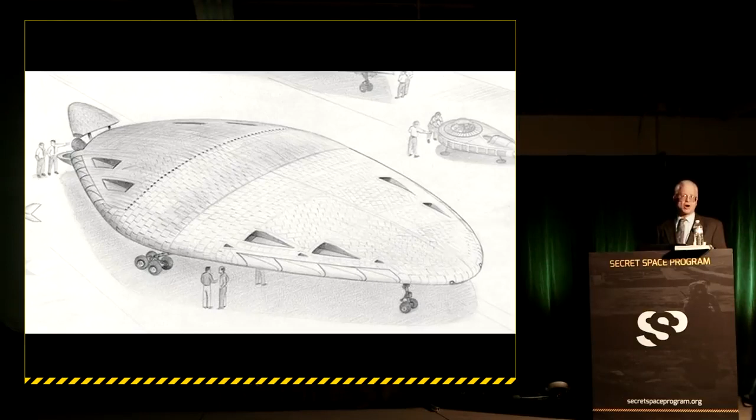Okay. This is the first generation Aurora. It was a remotely piloted vehicle. It was built by Lockheed Martin. And this object you can see in the distance was actually taken from a Polaroid photograph that was taken in 1984 near Cedarville, California, up in the northeast corner of the state.

Now, this is one of the other vehicles here. This is a drawing put together by my friend Michael Schratt. This particular vehicle I'll go into a little bit as well. It was a part of a crash recovery in East Germany.

Now, after I got out of high school, I realized that in order to go to the... Okay, there we go. Sorry about that. One of the things I was going to need to be able to do in order to go to the college I wanted to go to, which was a place called Art Center College of Design in Pasadena, I wanted to design cars for General Motors. And this was the premier college that all the designers would go to. And at $2 an hour minimum wage at the time, I knew that there was simply no way that I could afford to save up the money to go there. So I decided to join the Air Force and get the GI Bill to help pay for my college education.

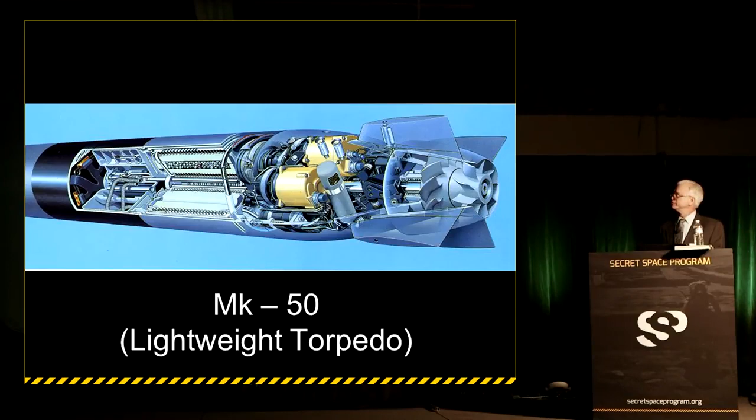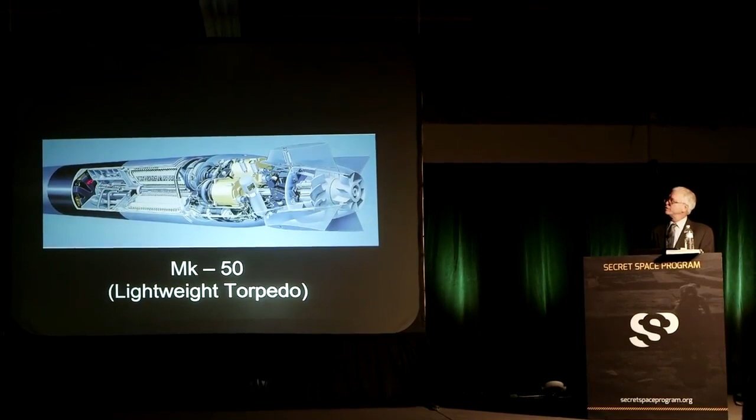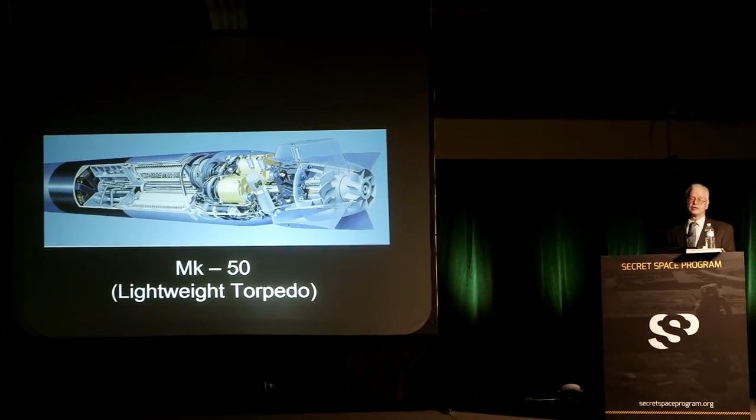This is a cutaway illustration of a propulsion system for a lightweight torpedo that basically involves a lithium core that is ignited once it drops into the water. And this heats up an oxidizer, flows through here, it creates steam, high temperature steam through these heat exchanging tubes here, goes through a transmission, drives a generator, and also a couple of counter-rotating props in the back.

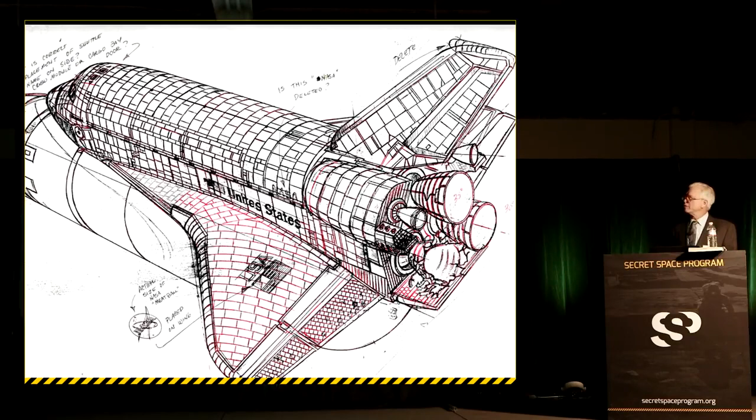But being able to figure all that stuff out, and I take a lot of pride in the accuracy of my work, involved a certain amount of engineering. And even though I'm not an engineer, I don't have an engineering degree, I spent an awful lot of time studying how things are put together, how they work, what makes them function, what the physics and the engineering are behind these systems.

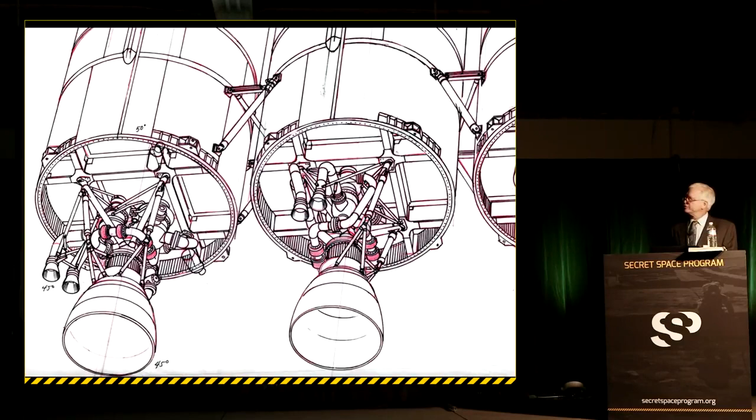But eventually, while I was working in the industry, I actually had the opportunity to make contact with a lot of people in the military, some of whom expressed an interest in having some of my artwork in their squadron ready rooms. And so I was actually able to arrange to get what are called media orientation rides and go up in these planes and see how the pilots handle the stress of flying.

And I kind of wonder whether or not we ever would have been able to get off the ground if we hadn't had those other naturally occurring creatures to give us inspiration. And so as we began to learn how to fly, as the Wright brothers and all the other pioneers put together these machines, it gave us this capability.

Of course, there was a military application. First probably was seen during the First World War in Europe, using aircraft for observation or for bombing and harming the enemy troops. And so, as time went on, there was a competition between the different sides, looking for ways to raise the performance level of these aircraft so that you could outmaneuver your competitor, build an aircraft that could pull more Gs.

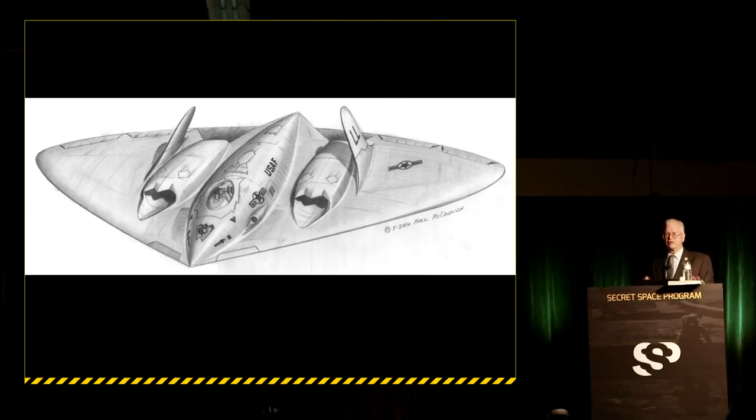There are ways that you can modify the inlets for the engines so that when a radar beam from a distance is looking at the sky where the aircraft is, it's harder for that radar to get into the inlet where those metal turbine blades are turning and reflect a lot of the energy back and let the people watching for you know that you're there. And so applying these different techniques, looking for ways that you can make an aircraft perform better and do it very quietly, very stealthily, even in the materials that are used.

I'm sorry, I pushed the wrong button here.

These aircraft have a number of ways in which they can be deployed. They can be deployed by flying right off of a runway, or they can be deployed as a parasitic aircraft, as in this case. This is the second generation Aurora on a carrier vehicle. There have been a number of questions about what the name of this vehicle was, but for me, the discovery of its reality was kind of what led me down the road to being aware, or suspicious anyway, that there was a kind of secret space program.

And so the way this happened, I was approached by Lockheed Martin. I think at the time they were still referred to as only Lockheed. And the particular division that I was approached by was approaching me on behalf of the Skunk Works division. And they said that we have a new aircraft that we want to build, and we need to get the appropriate funds from the government. So we need you to create an illustration for us that shows an aircraft that's really fast, something that looks dynamic, very, very fast.

And at the time, I was reading some of the trade journals like Aviation Week and Space Technology, and I knew that one of the up-and-coming technologies that they were talking about was something called scramjet technology, which is kind of shorthand for supersonic combustion ramjet. Basically, it's an engine that kind of starts out as a normal turbojet with turbine blades that are turning, and then you can change the flow of the air through the system so that it largely becomes just a big tube that you dump fuel into, and the air rushing into this venturi, this tube, is being jammed in there so fast and at such pressure and under such heat. When air is compressed, it heats up, that this particular mechanism would cause almost a spontaneous combustion, if you will, with very little input to make the combustion process and the forward thrust continue.

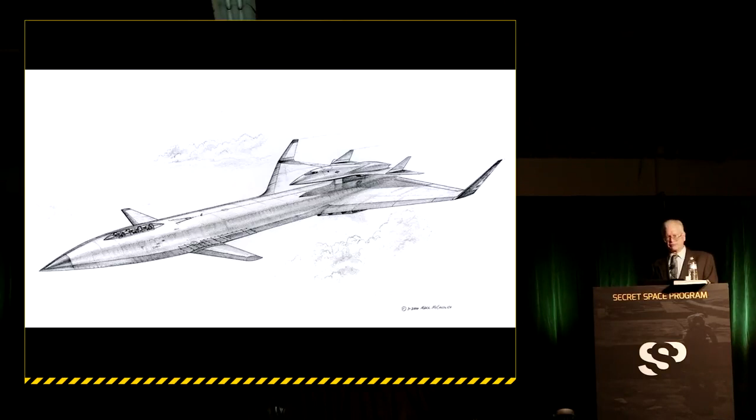It turns out that shortly after I submitted a sketch of this particular aircraft, they decided that they were just going to completely scrap that. And so I wound up doing an illustration of an aircraft something like this. There was one proposal where it might actually be possible to deploy this particular aircraft right out of the back end of a flying C-5A Galaxy. And this is sort of my conceptualizing of how many you could actually fit into a C-5, knowing what the size of this aircraft was.

It had a scramjet nacelle on the ventral surface, and it also had one on top. This particular version only had one underneath. And because of the shape of the aircraft, it made it very peculiar, or very sort of awkward, where the landing gear would come out in order for this thing to work properly.

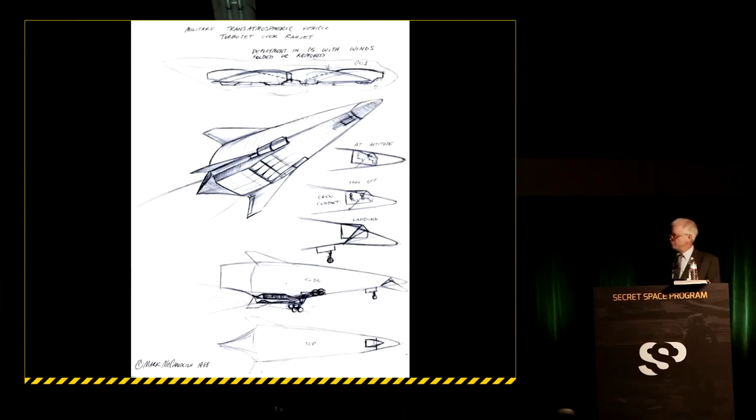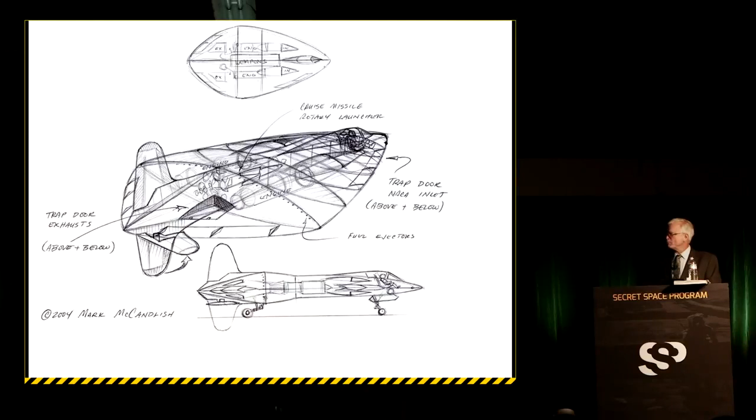Now, about the same time, there was a lot of talk about a crash, an aircraft vehicle crash that had occurred somewhere near Barstow, California. And there were some people that were describing different features of the aircraft. There was a fellow that I met and talked with who was friends with a number of the astronauts, and they were describing how there was a particular astronaut flying a Learjet, ferrying it from one location to another through the state of Nevada.

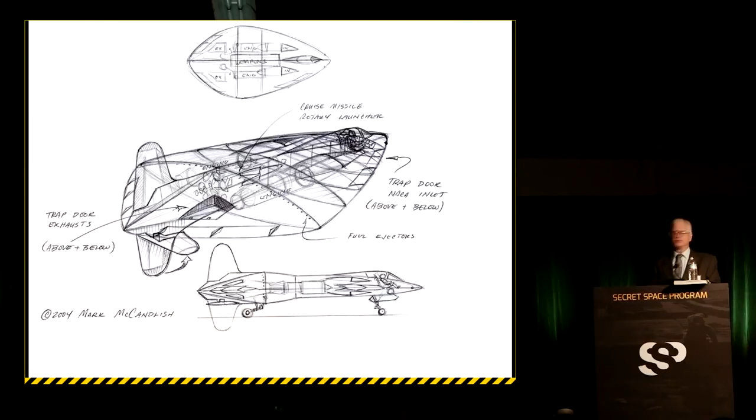And he came out of the clouds and he found himself sitting slightly above and behind an aircraft that looked just like this. Now, the interesting thing about this aircraft is that it had some very strange features. It had engines that were buried inside the fuselage with sort of an NACA duct-shaped inlet there. There was kind of a slot in the back. It looked like there was maybe a trap door, control surfaces along the bottom, exhaust diffusion.

But it also had this very interesting feature, and most people don't know this, that the predecessor of the SR-71 Blackbird, the YF-12A, which was kind of a strategic aircraft used for missile delivery, also had a folding ventral vertical stabilizer, or tail as you would call it. And so this aircraft obviously had that same particular feature. The vehicle was all black, or sort of a deep gray.

And as the pilot was flying along, looking at this thing flying through the clouds, he suddenly realized that if he had not seen this thing directly, he might have collided with it as they were flying through the clouds together. So he gets on the radio to his ground control people and says, I've got some traffic up here, why didn't you warn me? And they said, well, there isn't any traffic up there. And he says, well, of course there is, I'm looking right at it. It's black, shaped like a flattened out football shape, no wings to speak of, two tails, one above, one below.

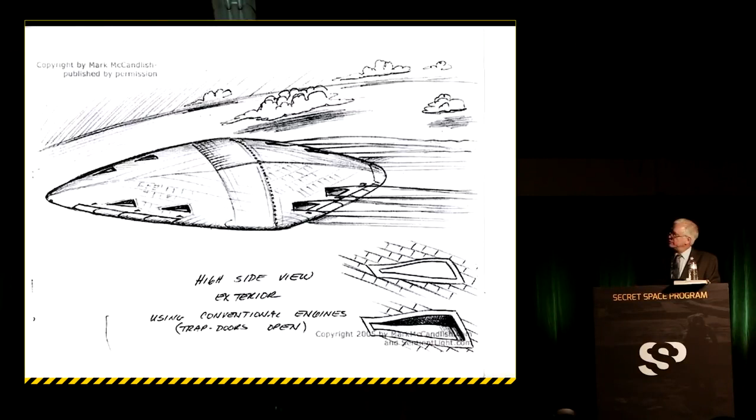And so he went through a lengthy debriefing about what he saw or what he shouldn't have seen regarding this particular aircraft type. Now, one of the things that this particular aircraft had that wasn't immediately available or immediately evident was a ridge that ran laterally across the widest part of the aircraft. And on that ridge were a number of what looked like fuel ejectors or fuel injectors pointing outward.

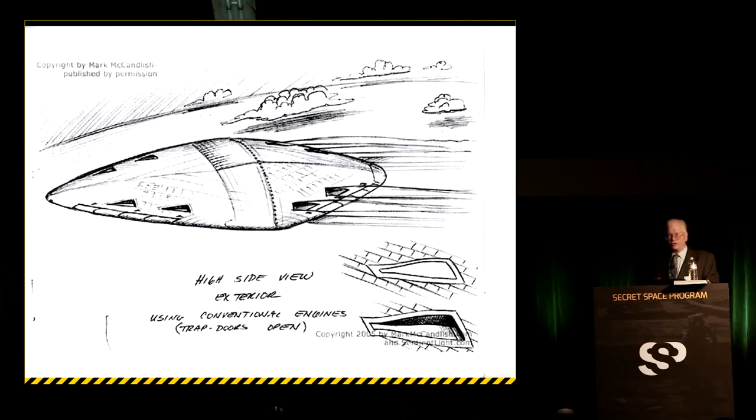And this aircraft here was then being described within the industry as this vehicle that would produce an exhaust trail, the so-called donuts on a rope exhaust trail. That seemed to imply that there were two different propulsion systems in use in the aircraft to get it up to speed. Nobody really understood what they were or what actually made the aircraft function in the way it did.

But as it happened, I was asked to do this painting for Popular Science on the so-called Mach 5 spy plane, and it went into details about all the seismic events in Southern California that sort of raised the curiosity of some of the people to watch what was going on. And I remember at the time, this was in the late 1980s, early 1990s,

that you could go out into the high desert of Southern California at night and you could see these things flying overhead, flying back and forth. When the sun was just below the horizon, it was dark out, but there was something still up there. You could see it moving and moving very quickly.

Now, about the time that I did that illustration for the magazine, I was contacted by a friend that I went to college with, and I invited him to go to this air show at Norton Air Force Base in San Bernardino, California, which is about 75 miles east of Los Angeles. The Thunderbirds were going to fly, and it was a little bit of an overcast day, but in the end, I wasn't able to actually attend the air show, mostly because I had to complete another illustration for a client over the weekend.

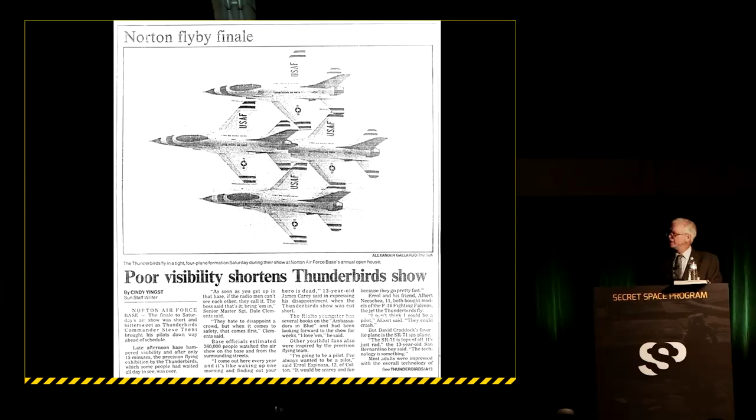Now, as they were going into the hangar, the gentleman turns to my friend and says he just realized that there are some aircraft on exhibit here that you're not cleared for security-wise. You are not cleared to see these aircraft. So just enjoy the show, walk around, listen, take a look, but don't say anything to anybody.

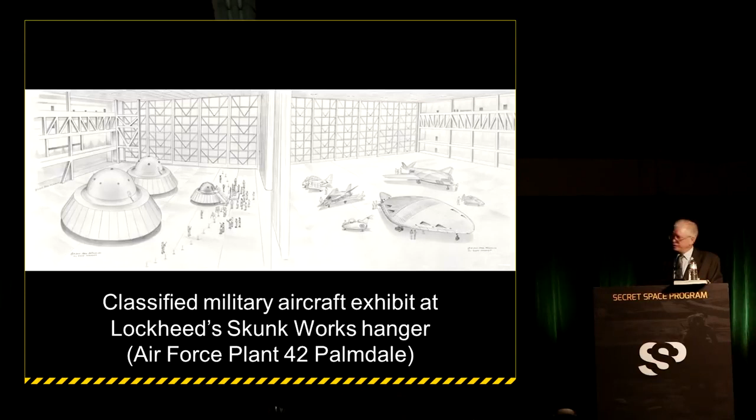Oh, I'm sorry, right here. This particular vehicle here, this is kind of a close-up, a rough close-up. It was a sort of an answer to or a follow-up to the A-10 Warthog, which was an anti-armor aircraft. It's a vehicle that carries a very big Gatling gun, fires thousands of rounds per minute, and is a very durable, very hard aircraft to take out of the sky. It's very heavily armored. Has a big gun that sits inside of it.

And so this aircraft here was designed with a very unusual kind of a wing. Now, in aerodynamics, they have something called the Coanda effect. And basically, it involves blowing air across the surface of a wing to provide lift rather than just relying on the movement of the wing going through the air in order to provide that same lift. So the design of this aircraft was that they came up with a way for mounting the engines above and slightly ahead of the wing, and then they took these high-temperature alloy, it's like a flattened-out funnel shape, really, that blows right over the wing.

And when the wings are all rotated in sequence, it forms a nice smooth ramp that the air can actually flow down. It goes from horizontal, following the surface of the wing with this Coanda effect, kind of an aerodynamic adhesion in a way. And so it redirects the thrust of the engine to a point where it's pointing almost straight down, right about where the center of gravity is for the aircraft. Now here's a computer-generated image that shows a little bit more detail of the same vehicle.

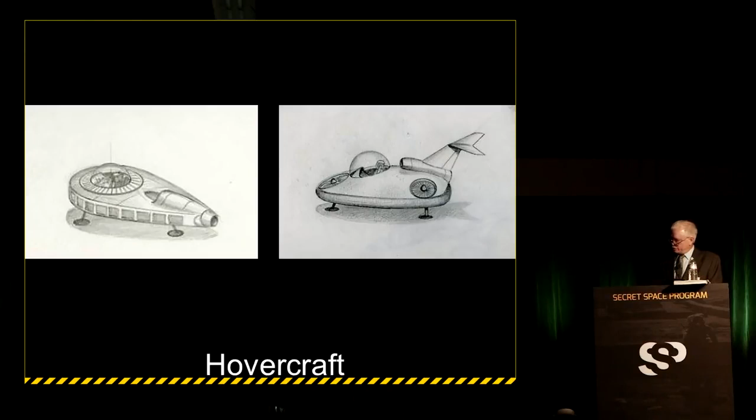The hovercraft were kind of unusual. There was one that had a jet engine in the tail of it, kind of a teardrop shape, and then around the perimeter it had a series of little trapdoors that would open and close as the thing was flying along. And this jet engine also had a transmission that connected up to a set of counter-rotating turbine blades that surrounded what amounted to a bubble-type cockpit, almost like something you'd expect George Jetson to be flying in one of his little cartoons.

This one over here, I've actually seen a version that's very similar to this in one of the popular science magazines, where it had a turbine in the front and two in the back, one on either side, that were driven by this particular engine here through a transmission of a kind. And it had the same sort of sphere-shaped cockpit too.

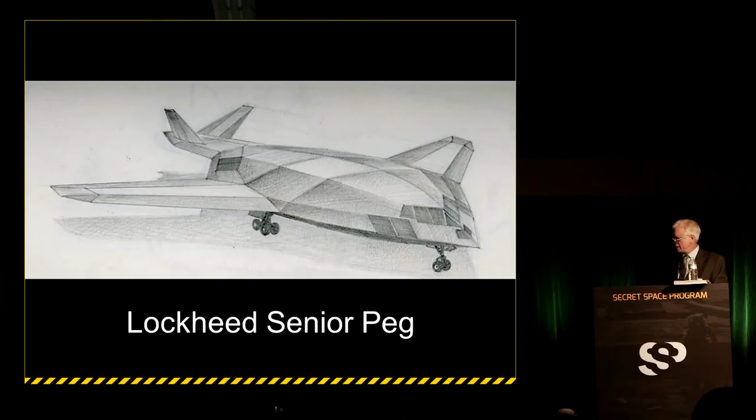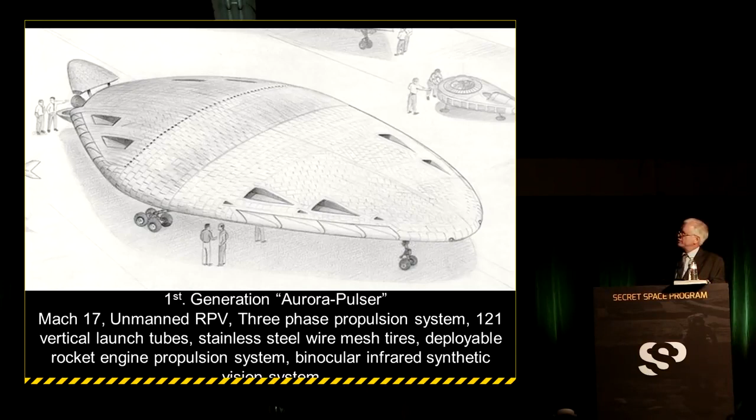And just like the aircraft that I showed you earlier that had the tail above and below the fuselage, this aircraft had the NACA duct style inlets for 4 engines and 4 exhausts, and this is both on the top and on the ventral surface or the belly of the aircraft. In fact, after I had discussed this particular weapon system on Coast to Coast with one of the hosts, I received some email from a number of sources indicating that there were inlets and exhaust ports both on the top surface and on the ventral surface.

Now, at the time of the exhibit, my friend said that he could only see the underside of the aircraft. He couldn't see the top of it because it sat up kind of high off the ground. And so he didn't know whether there were 8 exhaust ports or only 4. And it turned out that one of the people that I corresponded with after doing the radio program said that they had been jogging late at night during an evening when there was an aircraft like this leaving one of the United States Air Force bases in Great Britain.

And he said that what was unusual about the aircraft is that when it went to take off and it lit up the afterburners, which dumps a lot of extra fuel into the exhaust stream, you see this sort of a bluish glow coming out of the exhaust. He said there were 8 ports, which of course helps to point out that you have 4 above and 4 below. So we knew that was true.

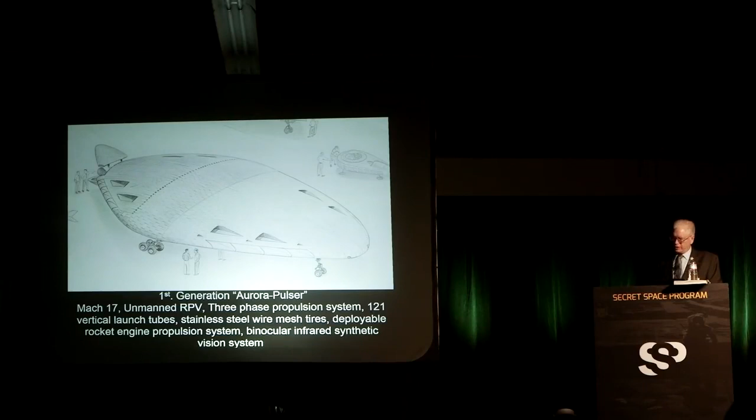The way the system would work was remarkably simple. It had a kind of tile with explosive bolts holding it in place on the outer skin, and sitting up behind it, the weapon would be held in place. It's not shown in this thing, but I've subsequently learned that there was a three-piece fiberglass sabot which would hold the weapon straight in the bore, so it would always be pointing a certain direction. But the ingenious and simple aspect was that when the explosive bolts on the outside were ignited, the tile would disintegrate and blow away. And when it did, a big coiled spring about 12 inches in diameter behind the vehicle would push it out of the hole.

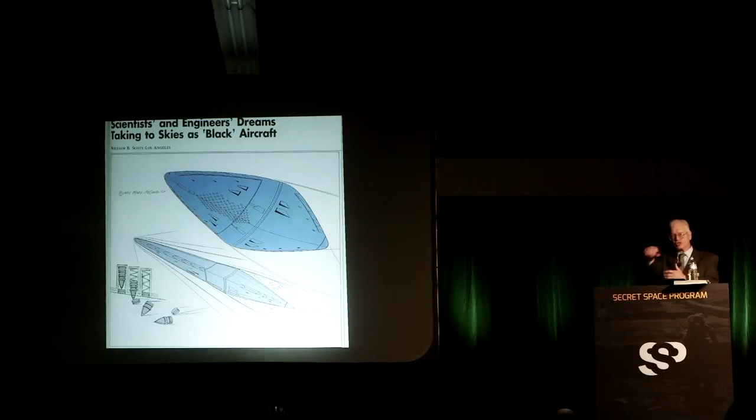And right behind the reentry vehicle was another tile that would slam down into place and cover up that hole again, in about a tenth of a second. The reentry vehicle, let's see, right there, would then stabilize, because of its center of gravity weights and its shape, in the airstream, go into the atmosphere, and be able to acquire its target and do its job.

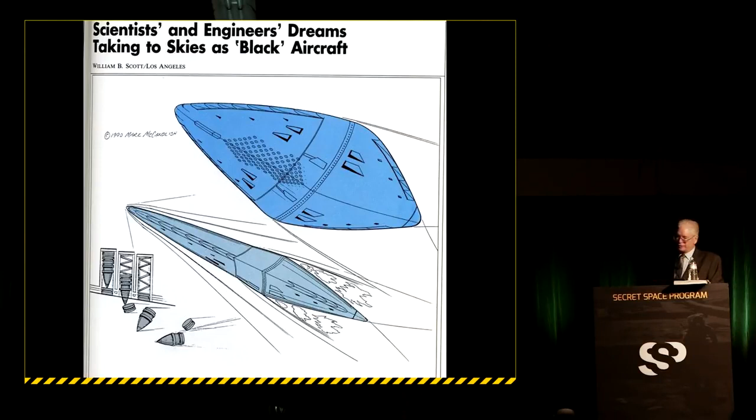One of the things that this particular aircraft would do, if you look at the ridge here where these fuel ejectors were located, would expel the fuel, and the fuel would be ignited by just the intense pressure and heat of the air flowing across the front of the aircraft.

Now, one of the things the artist did not capture in this particular view was the fact that the front end of this thing is going through the air so fast that it's glowing red hot, just because of the velocity, the friction going through the air at such a high speed.

And so as that air is further compressed as it comes up on this ridge right here, it meets with the fuel. As the fuel is sprayed into the airstream, it spontaneously combusts. But by this time, the aircraft is already going well over Mach 1. So there's a supersonic shock wave that forms and basically separates,

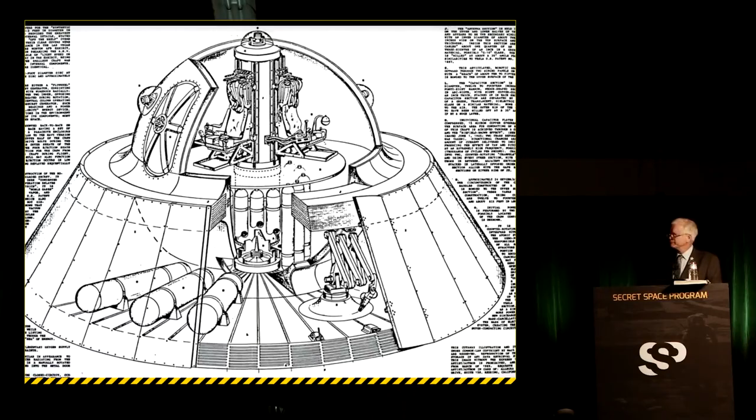Now, that number was very significant because shortly after this particular information came to me, the Los Angeles Times newspaper was running a story about crop circles. And there was a lot of debate about whether it was something that was being hoaxed or whether it was some kind of a natural phenomenon, highly ionized winds blowing over the hillsides in Great Britain, this kind of thing.

But some researcher went back a year later to see what would happen when the new crop grew up out of that same soil. And they discovered that when these crop circles grew back, they grew back with a perfectly symmetrical pattern having 48 spokes, the exact same number of capacitor sections in this particular propulsion system. So I began looking at, how would you produce a crop circle using a propulsion system like this?

Well, we know that the system has a series of coils around the crew compartment here. There's another series of coils that go up in this central column. So this layout has a configuration that looks very much like a Tesla coil, which is really just a high voltage transformer. You take a certain amount of voltage, you put it in, the two coils reach a kind of resonance, and in the process, it steps up the voltage to a much higher level, millions of volts in the case of something this size here.

And so when you put all of that electricity into a capacitor array down here, where you have all these plates that have positive and negative charges, you can build up a tremendous amount of voltage. Now, the first thing I thought of when I saw this was that this must have some bearing on a phenomenon that was discovered by Alfred Biefeld and Thomas Townsend Brown back in the 1930s or 1940s called the Biefeld-Brown effect. And really all it amounted to was putting a lot of voltage on a set of parallel plate capacitors.

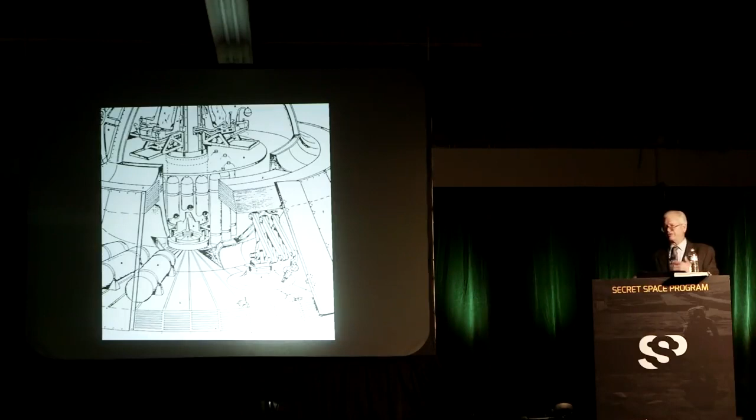So if you have, as in this instance, coils of single filament copper wire, or at least what appears to be single filament copper wire, running through this quartz-like material without multiple strands to conduct more electricity, it just seems like a contradiction. And so I began wondering if this wasn't just copper wire, it was copper tubing, and there was something else on the inside of the copper tubing. So then I looked at some of the notes from the eyewitness, and he described wrapping around the inside of this central column, and I thought of this as sort of like a cyclotron or some kind of device that produced high voltage. In fact, I think what was really happening was that the electricity would jump between these 2 points and create a high voltage event.

Now, free energy is kind of a misused term. Technically speaking, with gravity, if I were to drop this, I know for a fact it's going to drop to the ground, and that potential energy can be used. That's what's used in a hydroelectric dam: the potential of the water sitting up high, flowing downhill through a turbine blade, creating electricity. Solar energy hitting a photovoltaic array is a kind of free energy too. They're not trying to kill people for creating it, but the minute you create a device that produces more energy than you put into it, people start to get really worried, because if you're not real careful about how you apply the technology, you can get into what is called a feedback loop, like the sound problems we've had, where the sound produced by the system feeds back through the microphone, multiplies upon itself, and snowballs to the point where you get an unpleasant result.

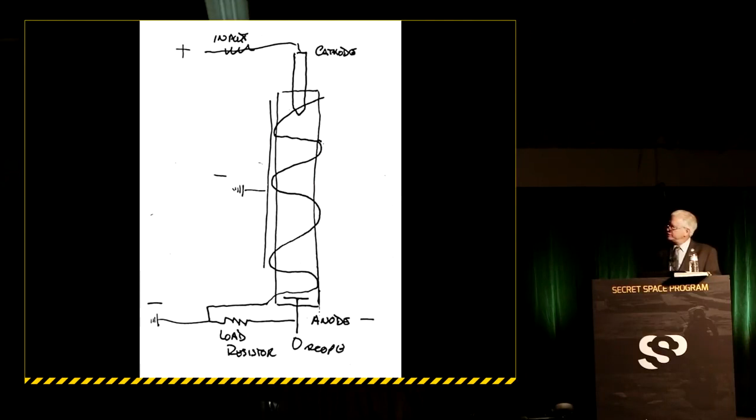So I started looking at what zero-point energy is, where it comes from, how it can be manipulated. And I looked at some of the papers that were written by scientists like Bernard Haisch, Alfonso Rueda, Hal Puthoff, Daniel Cole. And in the early 1990s, they wrote a number of papers that actually described, and you can see the similarity between the two things. You can see that there's clearly a design similarity.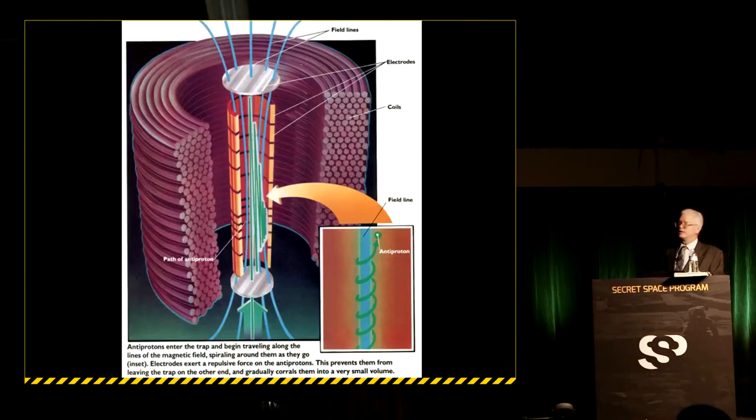And yet, I look for other possibilities as well. The possibility that we had something like an anti-proton trap going on here, where you have the same kind of coils going around the outside, a central column, a way of trapping antimatter. I thought that this might be something like the so-called antimatter drive that was used in some of the Star Trek vehicles. So I began conceptualizing, began looking at different ways that you could actually make this system work.

Now, I think it was somewhere in the late 1990s, early 2000s, I came across a number of books. Joseph P. Farrell, who's another one of the speakers here, had found some historical records after the Second World War that described a device that was being worked on by the Nazis in the Wenceslas mine up in southern Poland called the Nazi Bell Project, or Die Glocke.

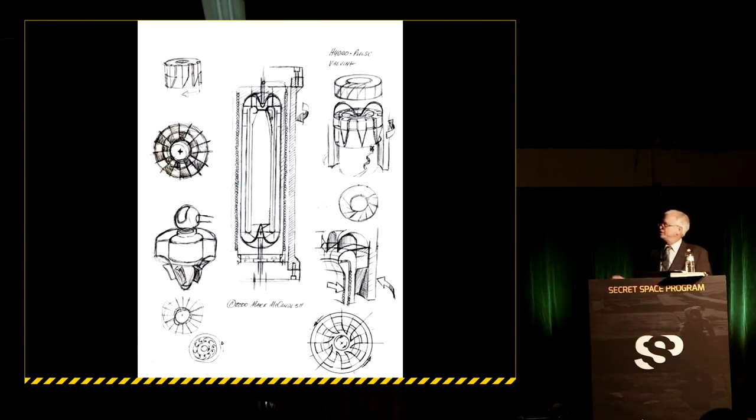Now, that particular system, based on the documents that were found, was made up of a pair of counter-rotating cylinders, one inside the other, with a coil that went around the outside. And electricity was being fired through the system. So I started looking at ways that you could make that work. Now, the first thing I thought of was that if you put a lot of electricity in this thing and you have big coils around it, you may wind up in a situation where you can't get an electrical motor to actually drive the system unless you had a pulley system sitting way off to the side, away from the electromagnetic fields that would interfere with its operation.

But I found out that, of course, mercury has some interesting characteristics. I think there's something referred to as the nuclear spin ratio. The particles in the nucleus of the atom of mercury and the electron shells, there's a spin ratio of something like 60 to 2. And bismuth, by the way, also has the same kind of property. And so I thought it was interesting that these two materials had these unusual characteristics that might make them very important in the operation of this kind of thing.

But what I found was that it goes all the way back to Michael Faraday, and the first electrical motor was really just a puddle of mercury with a magnet, a permanent magnet sitting in the middle of it in a petri dish. And he had a little scaffold off to one side with a copper conductor, and he put one wire into the mercury, sent it over to the battery. Another wire would hang down from the top of this little scaffold. And the minute you connected the circuit, the mercury would begin circulating around inside the petri dish, around this magnetic field.

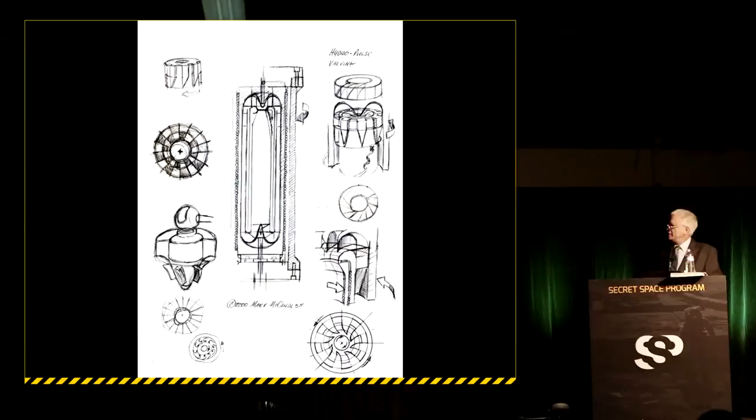And so if you look at the way the field lines are set up in this particular vehicle here, you can see that the field lines basically will go out around the outside and stroke down through the middle. That's what they do. And so by setting the system up in the way that it has been, you already have the built-in mechanism to make this thing rotate on the inside, just like Michael Faraday's little motor from back in the 1820s, I think it was.

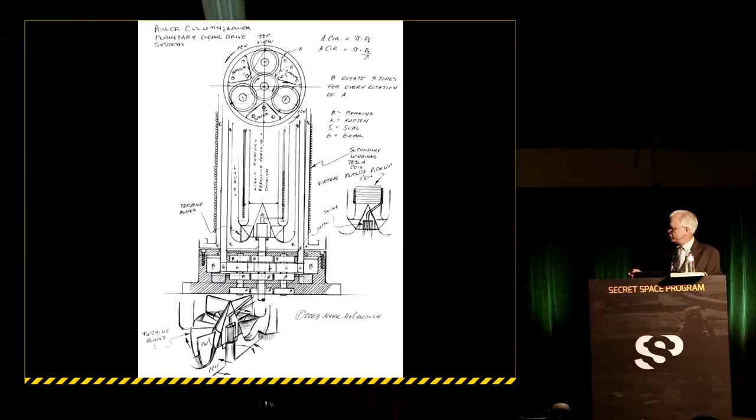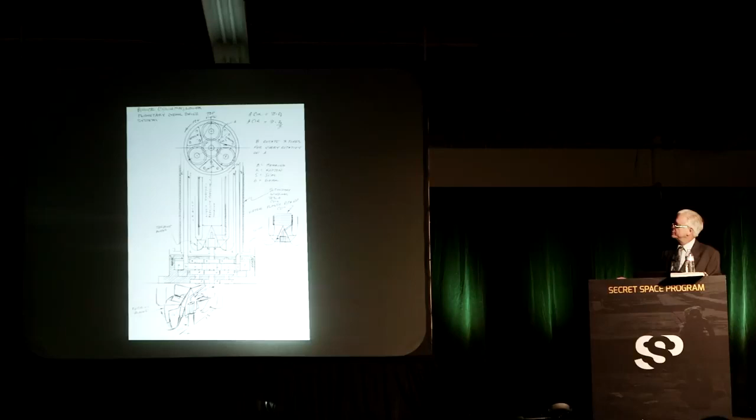But the other thing that I realized was that you're going to have some way of circulating the mercury. And so in one of the instances that I was looking at ways to mechanically do this and to get this counter-rotation thing going on that was described in some of the papers from the Nazis' experiment, was creating a kind of a planetary gear drive system that would sit either at the top or the bottom, so that as one of the cylinders is turning in one way, the gears would actually force the other cylinder to turn in the opposite direction.

And the benefit of doing something like this is that when you have things turning in opposite directions or sliding across one another, you get this vorticular motion in the mercury. And it seemed to me that that particular vorticular motion was something that would be very significant, very important to the operation of the system. And it's all leading up to the tapping of zero-point energy, which I'm going to get into here shortly.

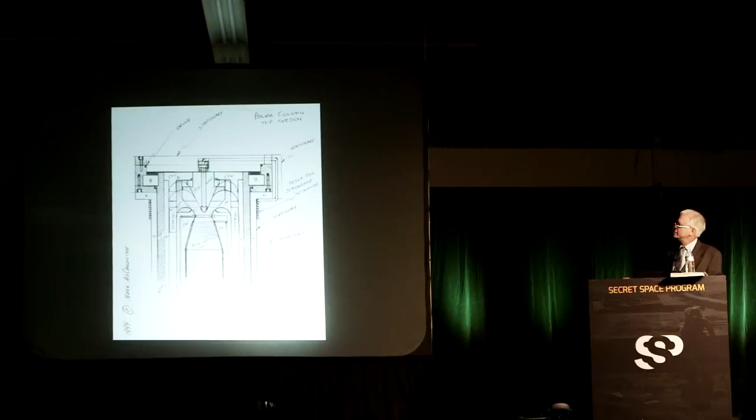But the idea was that the mercury would come up in the gap between the two cylinders, it would reach the top, and it would be basically forced down through this venturi, this little funnel-shaped opening in the bottom. You'd have your cathode up here at the top, and you'd have a ring embedded in the quartz of the interior cylinder. This is the other cylinder on the inside here. And you'd have coils inside so that as the mercury was being charged with electricity, it would actually cause the mercury to be circulating. But because the cylinders are turning in opposite directions, you get this natural sort of tornado-like vortex formation in the movement of the mercury through the system.

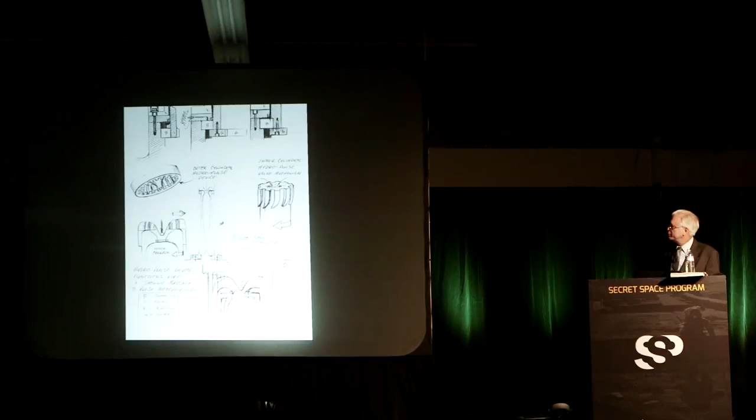Now, the next thing that I did, it's not as easy to see in this particular diagram. I wonder if the next diagram has, here's a little bit better way to see it right here, down here in the corner. You see the mercury comes up here, and it goes down through this opening, and then right below that second electrode that's shaped like a ring right there, you get the electricity jumping from there to there as the mercury is being pumped through by the natural flow caused by the electricity that's going through it.

A sudden discharge of electricity goes through the mercury, and the mercury is spinning the whole time. It's spinning like a tornado. You send the electricity through it, and when you do, it creates a phenomenon that's very similar to when a smoker blows a smoke ring. And if you've ever studied a smoke ring, you can see that it's caused by a sudden discharge of the smoke from the lips of the smoker, and the surrounding still air slows down the outer edge of the smoke as it's being expelled. So it creates a self-stabilizing event where the smoke forms a perfect ring. Even dolphins can do this with the air that's blown out of their blowhole.

Now, the other thing about that is that you find that this phenomenon is moving downward, probably at something approaching supersonic speeds, down through this central column here.

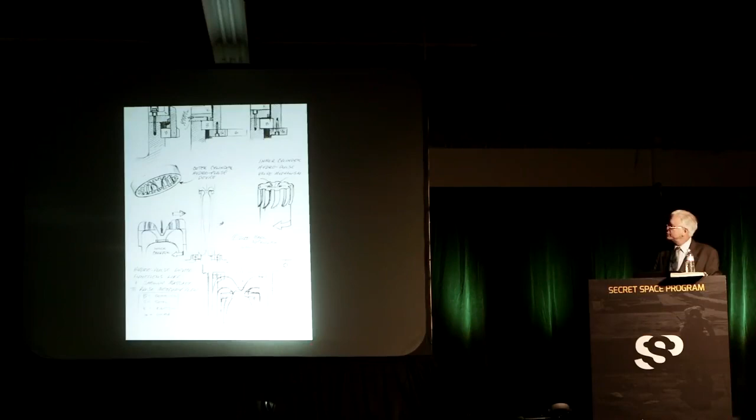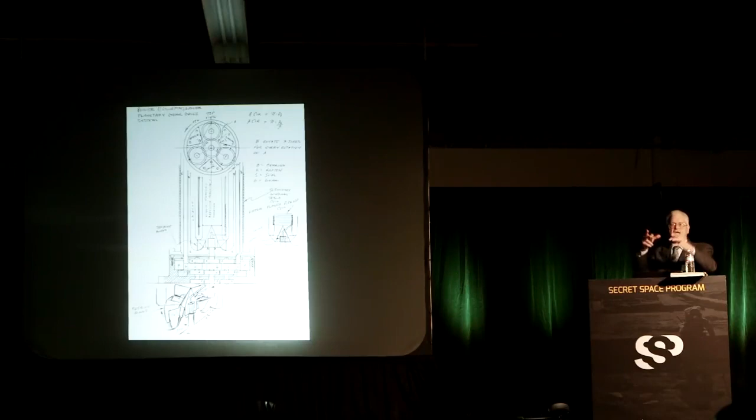There we go, down through the center, right there. That because of the rotation of the device, not only is it creating a kind of a smoke ring of ions, highly charged ions that are blowing down through the center of this device, but you also have a precessing, a rotating around a horizontal axis and a vertical axis, so that you have this twisting motion that goes on.

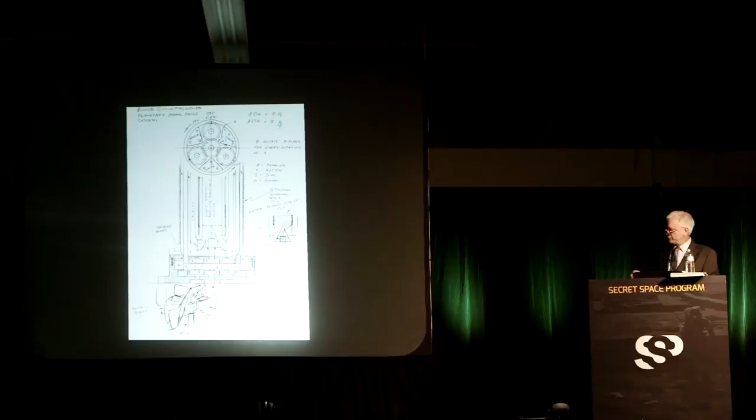And so what it winds up simulating is ball lightning, which is a naturally occurring phenomenon. It's noted for its ability to sort of be self-sustaining. It creates its own electromagnetic field. So in the process, what I really think that I've sort of stumbled across is a way in which

this system here has three different electromagnetic fields. It has the one created by the primary windings of the Tesla coil. It has the windings in the center that also create their electromagnetic field. But then when that plasma ring, or I should say it's actually a sort of a low temperature plasma-like phenomenon, or a virtual plasma, fires down through the center, it also creates its own set of electromagnetic field lines.

And so what happens is you have an effect that's very similar to, you've heard of the electromagnetic pulse that occurs when a nuclear bomb goes off. Well, they actually have a weapon. It's called the explosively pumped electromagnetic pulse weapon. And it does the same thing. It just combines overlapping electromagnetic field lines, and then using explosives, it pinches all those magnetic field lines, and it creates a powerful pulse.

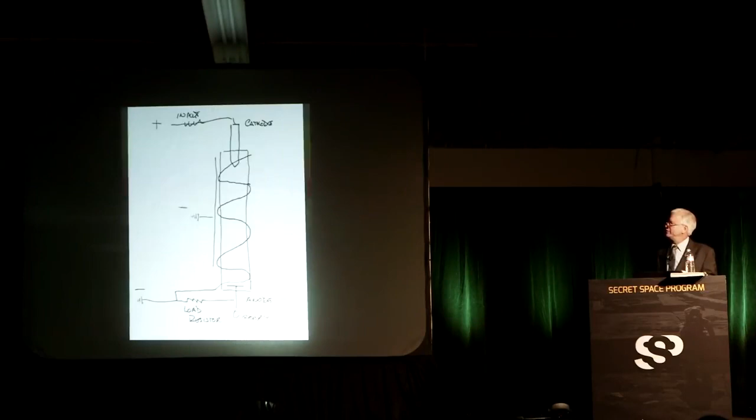And so what I'm suggesting to you is that process actually forms a kind of a doorway for tapping into this zero-point energy. Now, why is that significant? Why does that mean anything? Well, part of the reason is that this device, when it taps into zero-point energy, they've shown that zero-point energy is actually responsible for the effect of gravity, for inertia, and for mass.

And so if you're pulling some of that energy out of the environment, even though there's an infinite amount, some of the latest figures are 10 to the 109th power joules per cubic centimeter. That's one of the latest figures I've seen. That's a monstrous amount of energy. That's enough energy that if you took all of the energy that's in this amount of space-time and were able to tap it, it would be able to boil off the oceans of the entire planet.

So you can see how this technology makes a hydrogen bomb look like a firecracker. That's probably one of the reasons why there's such a tremendous effort to suppress it, because in the wrong hands, obviously, it could be weaponized and be very dangerous. But if used in peaceful ways, of course, it provides you a tremendous amount of power.

And that power, when pulling this energy out of the environment, it's my belief that there is a moment in time where it doesn't allow that zero-point energy to interact with the atomic structure of the vehicle. Now, this interaction is what is referred to as the creation of mass. For example, Einstein said you can never travel faster than the speed of light because as you accelerate through space-time, your interaction with the zero-point energy that's embedded in space-time raises your mass.

And so it makes it harder and harder for you to go faster and faster, so you can never really reach the speed of light. In fact, he said that as you approach the speed of light, your mass would become near infinite. So imagine then that you're actually using the free energy of zero-point energy. You're tapping that as your propulsive force. You're using it in the environment.

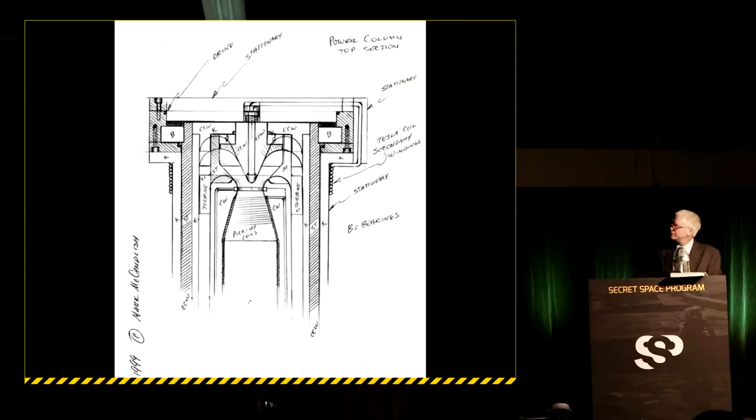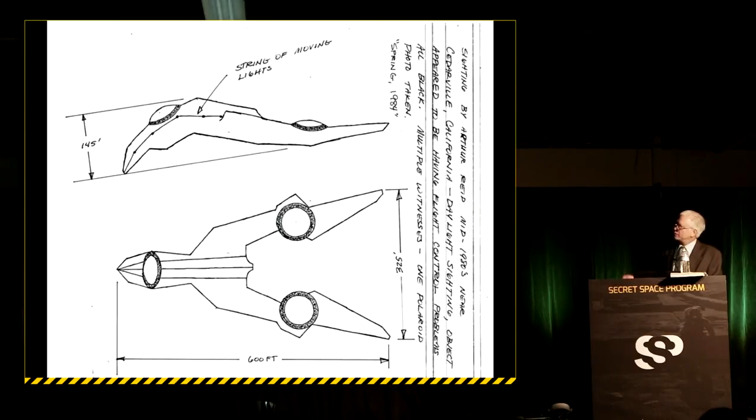Now, under a loupe looking at the original Polaroid, you can actually see a little bit more detail. This was a drawing done by the eyewitness, the fellow who took the photograph. And there were some things about it that I could probably go into, but the thing that's important to remember is that some of the features look remarkably like some of the structure on the so-called alien reproduction vehicle.

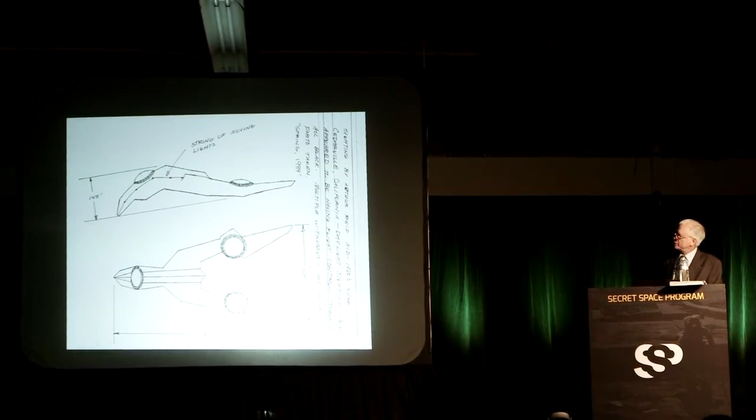And in fact, it did seem apparent to him that these wingtips, if you want to call them that, could actually rotate inward so that this thing would actually become more of a triangular shape, which also, of course, would help with issues like storage. Now, this is a little bit more detailed drawing that I did based on what I could see through the loupe. Actually looks like there may be some ways in which this area and this area here can be articulated so the thing can kind of fold itself up for storage or for putting it into a hangar.

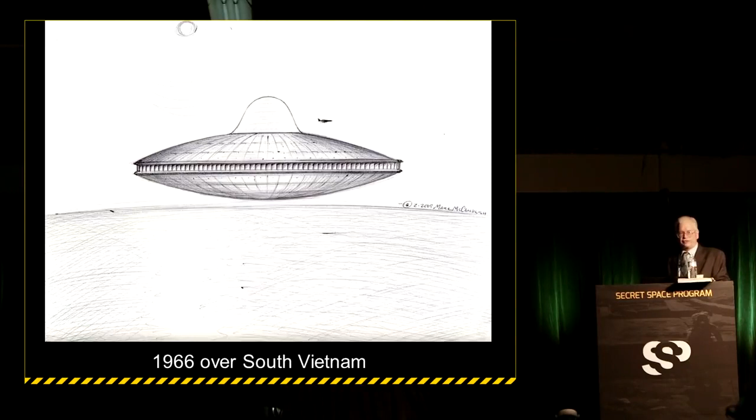Now, there's a lot of other incidents, eyewitness testimony, pilots that I've spoken to. This particular image refers to a sighting that occurred back in the mid-60s on the way back to Vietnam. That aircraft right there is a B-52, which is a huge aircraft. They said that this vehicle had a translucent illuminated dome that they counted 27 stories in there, and that was kind of how they helped to gauge the size of the thing. But he said that each one of the turbine blades, these are rotating turbine blades around the perimeter here, each one of them was the size of a bifold door on a huge hangar.

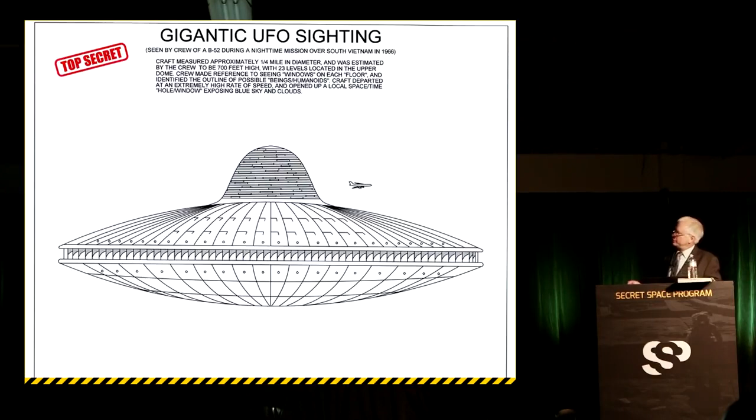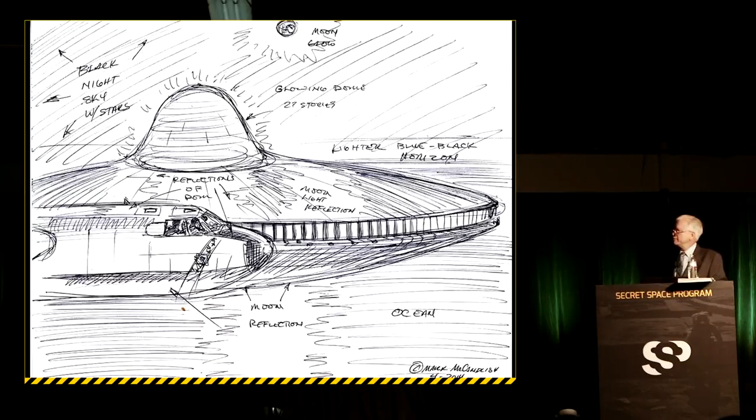And so one of the things that was significant about this particular encounter, this is kind of based on an eyewitness, it's just a rough sketch here, but this was taking place at night over the ocean at 1 o'clock in the morning, no clouds, just the moon. And when this aircraft, this large disk, which they estimated to be a minimum of 1/4 of a mile in diameter, when this thing departed, as it went out through the blackness in the sky, in its wake was this turbulent, shimmering image of what looked like a blue, daylit sky with clouds.

So what seemed apparent to the crew of this B-52 was that when this thing created a wormhole, there was actually kind of an image dragging that would go along with it, that it would either show you where it was going to or you'd see some of where it had come from. Now, I've personally witnessed that on at least 2 occasions. And very often you find that these types of events are very mystifying and hard to understand because you don't readily understand what it is you're looking at.

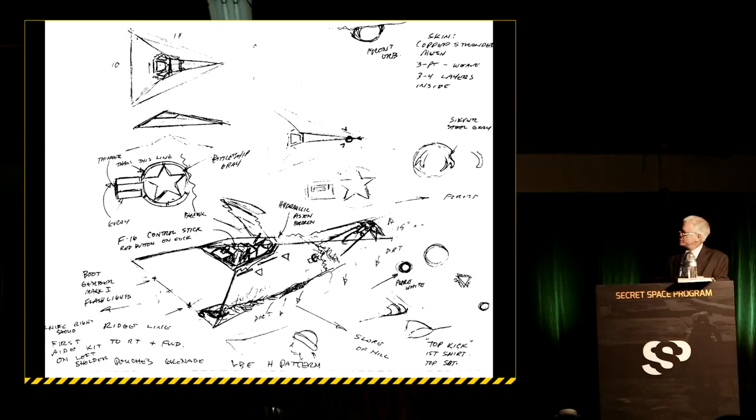Now, like I say, I'm running out of time here. This is a crash recovery that occurred in May 1989 in East Germany by some of our special forces. It was a vehicle that was utilizing what appeared to be a lot of stealth technology. The canopy on this thing had a lot of the same kind of details that you would see on the stealth fighter. You had the same sort of jagged edges, same sort of features that would help to defeat radar reflection, things of that nature.

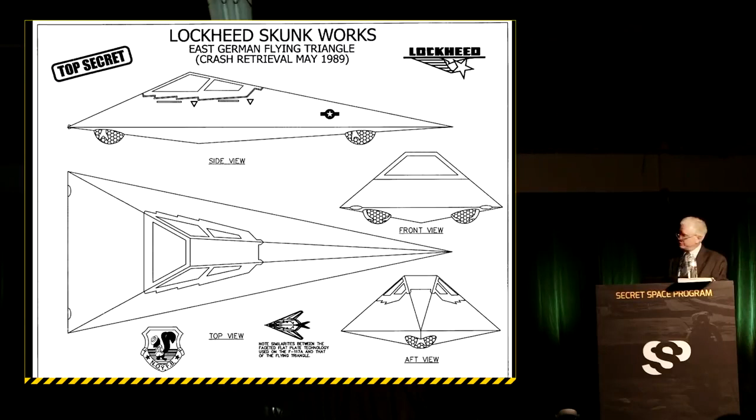This is a sort of a mechanical 3-view drawing that was done by my friend and colleague Michael Schratt, who I owe a lot to for helping me put this presentation together. But what was interesting about this particular vehicle was that it had these spheres that appeared to be made of a white ceramic material, like a superconducting ceramic, like yttrium barium copper oxide.

When the vehicle crashed, the pilot hit a tree coming over a ridge line and then tried to pull the nose up. He hit tail first, and when he hit tail first, it broke the tail in half, and it released one of these spheres.

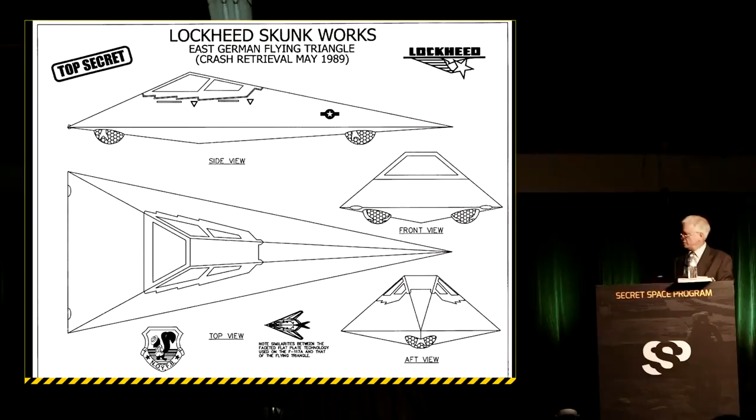And that sphere looked pretty much like this. It had a couple of wires coming out of the top. There was sort of like a little circular opening there with sort of a metallic thing in the middle. But it had this beautiful sort of pumpkin shape with this scalloped appearance.

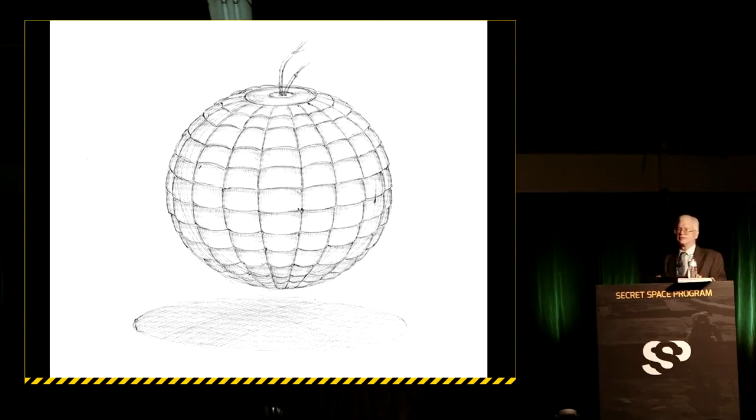And he said that when the thing was bobbing around the field and they were trying to recover this thing, every once in a while it began to spin and wobble and get a little faster, and then sparks would jump across the two wires that were exposed, and it would slow down. It would start to calm down again. They were given an aluminum utility case to try and capture this thing. They were told not to touch it with their bare hands.

So there's two reasons I can think of. One, either they're using cryogenic fluids and it's really, really cold, and they might get a burn, or they might get electrical shock, which seemed pretty apparent. But the thing was floating above the ground.

So one of the things we know about superconducting materials, and I'm thinking of this in the context of a propulsive system, but if you've ever seen any of the films on YouTube or on the internet of superconducting wafers floating above magnets, is they have to be set, as it's referred to, in situ, in order to create that levitating effect. In other words, you have to chill that ceramic material down right at the spacing that you want to establish between the magnets and the object itself.

So it'll maintain that attitude. You can crank it at a certain attitude and it'll maintain that attitude, and you can move it around, but it'll always stay in that one reference angle.

So I started thinking that if this thing is filled with some kind of cryogenic fluid, and this is some kind of high-temperature superconducting material or ceramic material on the outside here, you can see that the scalloping may actually create a kind of turbulence pattern on the inside that helps to stir it up. And one of the things we know about superconducting materials is that when they get anywhere near moving magnetic fields, they produce a lot of electricity. And that electricity, unlike normal conductors, which will cause the energy to bleed off, superconductors tend to hold that charge. They tend to hold it for a while.

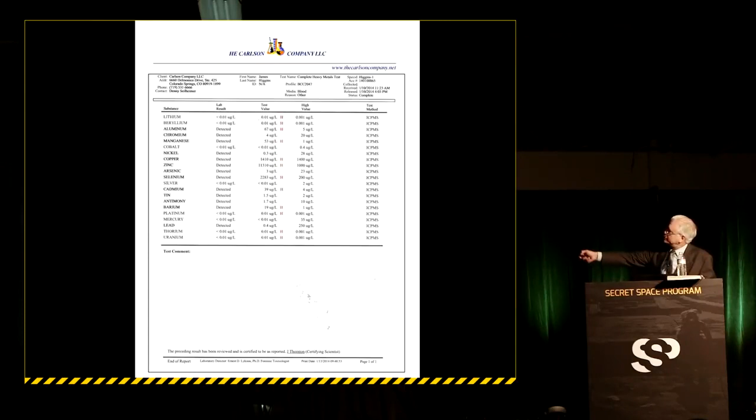And what we found, it's really hard to see on this chart because it's so small. I wish I could blow it up somehow. But basically, all of these little things here, we see an H next to those levels right there. Those are all radioisotopes like uranium, thorium, beryllium, cadmium, things that you would not find naturally occurring. So it seems apparent to us that he was poisoned using radioisotopes.

And so I'd like to dedicate this presentation to the memory of my friend James Higgins. He's a brilliant young man, had great potential as a filmmaker ahead of him, and I thank him for the time that he dedicated to documenting what I did. And I'd like to thank you for your time and your attention. Thanks very much.